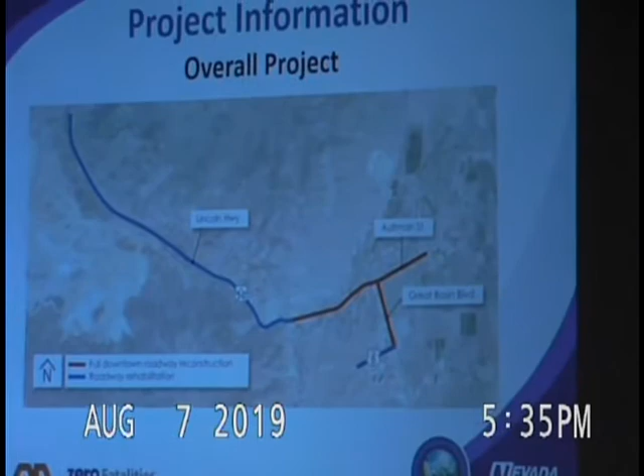Overall, the project is a lot of what you're seeing out there right now. The blue line is currently being constructed, the 3R portion, as well as some trunk line ITS conduit that's being put in. That's under construction right now. You guys are probably driving through those construction zones every day as you're moving around.

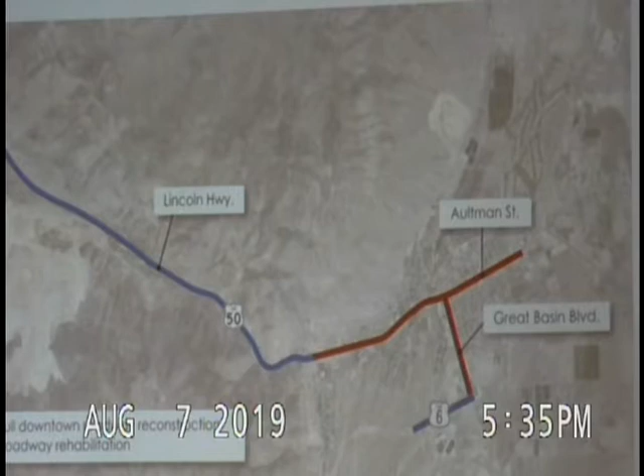The project we're really focusing on tonight is the red, and that would be the Downtown Reconstruction Project. It basically goes from 1st Street out towards 15th Street on East Aultman, and then up Great Basin to Highway 6.

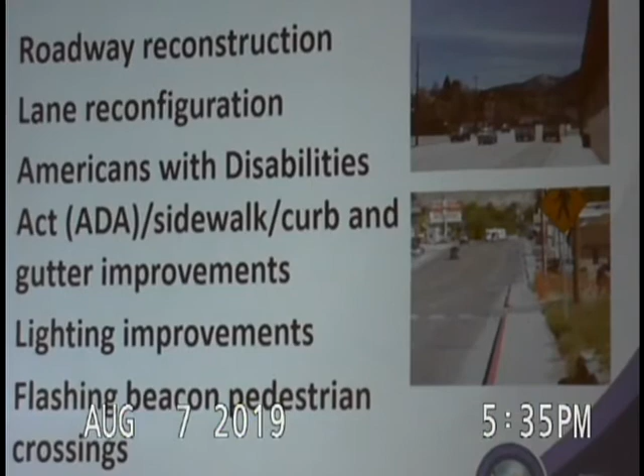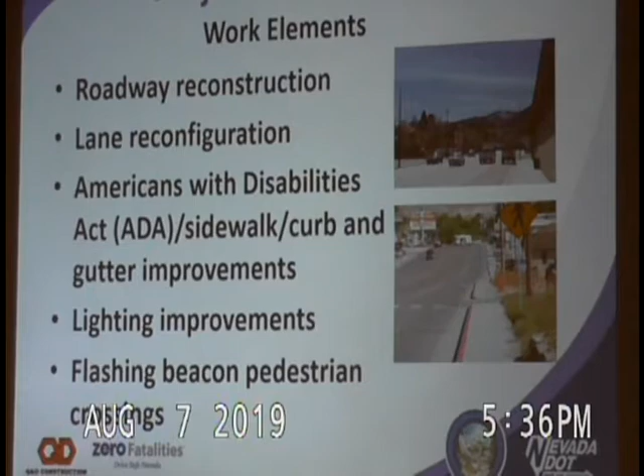The work elements are roadway reconstruction, some lane reconfigurations, Americans with Disabilities Act, ADA, improvements which will be sidewalk and curb gutter improvements, curb ramps on the street corners, and lighting improvements, flashing pedestrian beacons. These are pedestrian-activated flashers, so that when pedestrians are crossing the heavier used crosswalks, they'll be able to push a button, and it will blink an LED amber light to warn drivers that pedestrians are trying to cross.

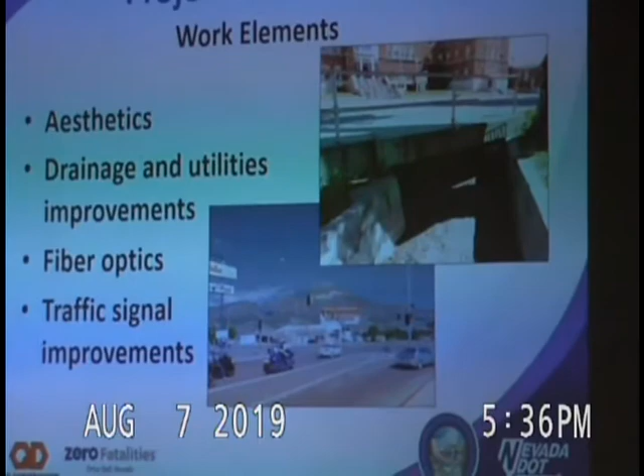Aesthetics, drainage, and utilities improvements, fiber optics. The fiber optics we're actually installing will include some internal NDOT fiber going in for our needs, and then we are putting in a trunk line for future fiber optic expansion throughout the downtown corridor.

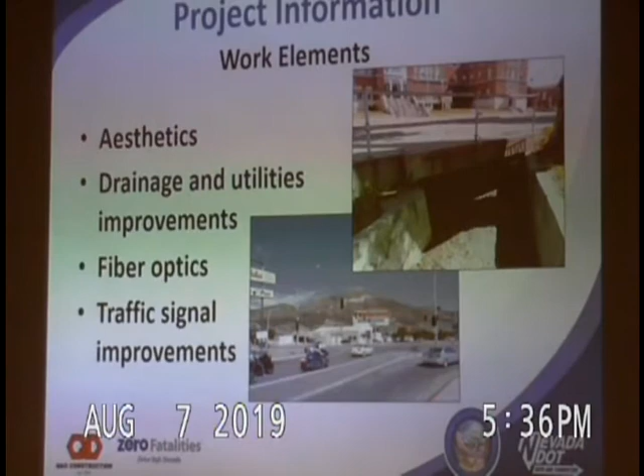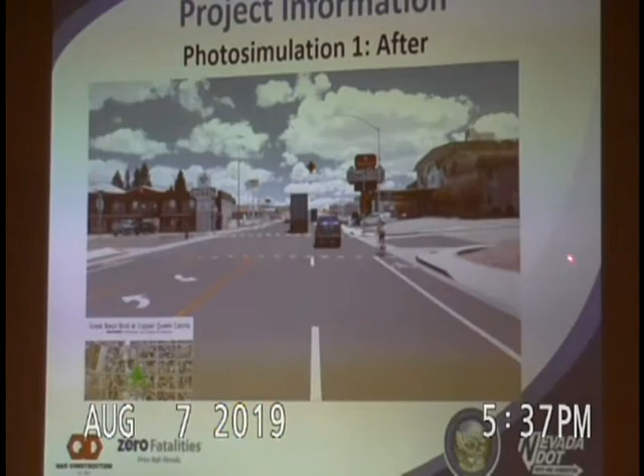Traffic signal improvements, so these, if you've been here before, will look very similar. If you're over at the boards, they're also what we have displayed there. You've got your before and after at the Copper Queen. This is one of those pedestrian-activated flashers up here, so when pedestrians are coming down across the crosswalk, they'll be able to hit a button, and it will blink to advise drivers that somebody's getting ready to cross. The downtown corridor is right here across from the Nevada Hotel.

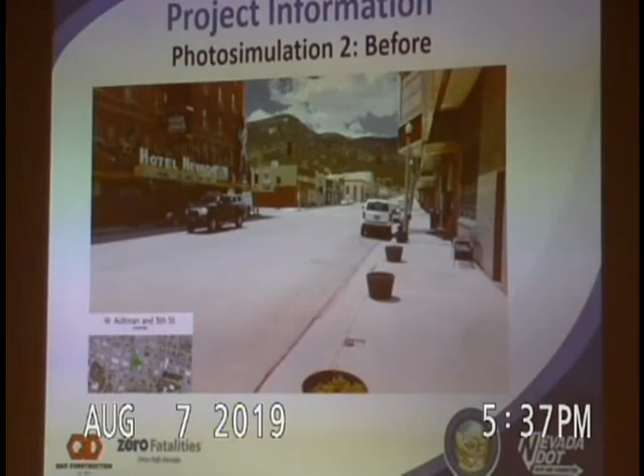And there's the before and after. We're looking at maintaining the on-street parking that's currently down there, putting in bike lanes. We'll be converting the current 4 lanes downtown into 1 lane in each direction with a 2-way left turn lane in the center, similar to what you have on Great Basin heading up the left turn lane.

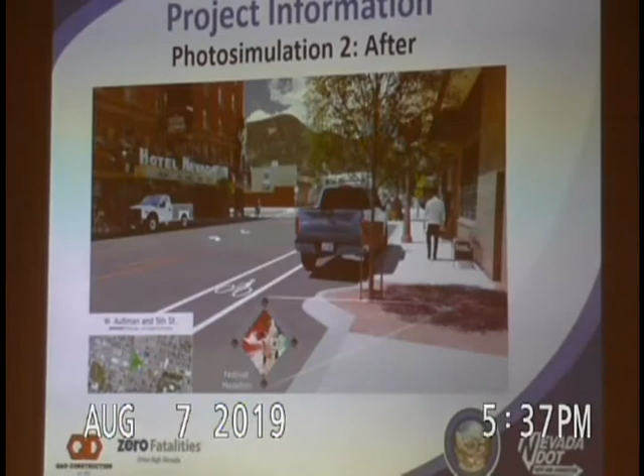Intersection improvements at Great Basin and Aultman. We'll be having a free right to the east, which actually heads north. And then there's the 2 lanes going up, so we'll be doing the same thing with that complete streets concept. We'll be altering the striping a little bit.

We'll be improving the intersection with dual left turns here. So you'll see the trucks in the right lane, cars in the left lane. Those will be able to move simultaneously through this intersection and up towards Highway 6. That should improve the functionality of that interchange significantly.

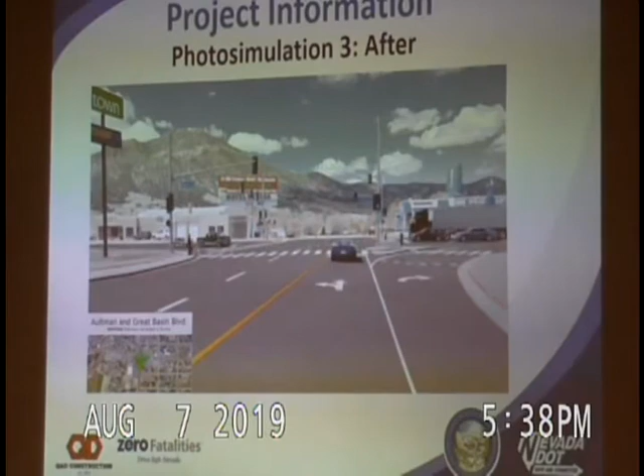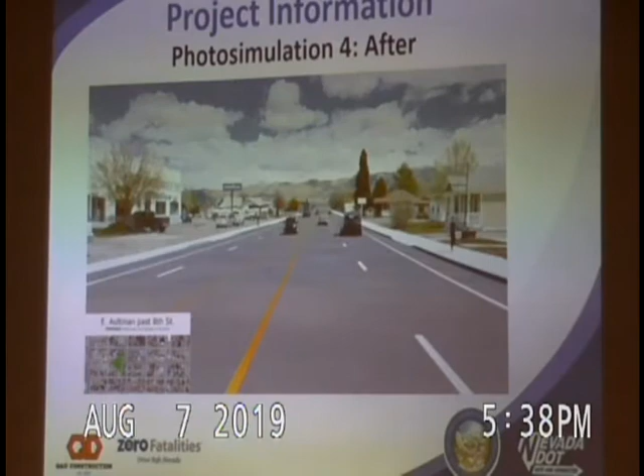And then the before and after of East Aultman. This is right by the tire store, and this is where we'll be transitioning back out of that complete streets concept into the 4-lane configuration for East Aultman.

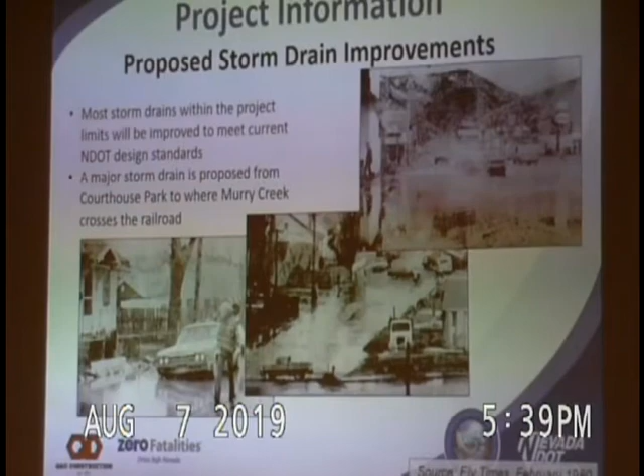And then we've got the drainage improvements. As some of you have been around a while, you know the downtown section has historically been flooding occasionally. We are actually going to upgrade the downtown storm drain system to hopefully relieve a lot of this.

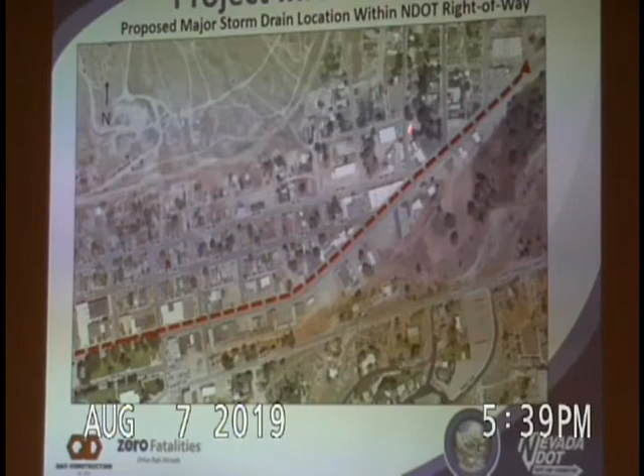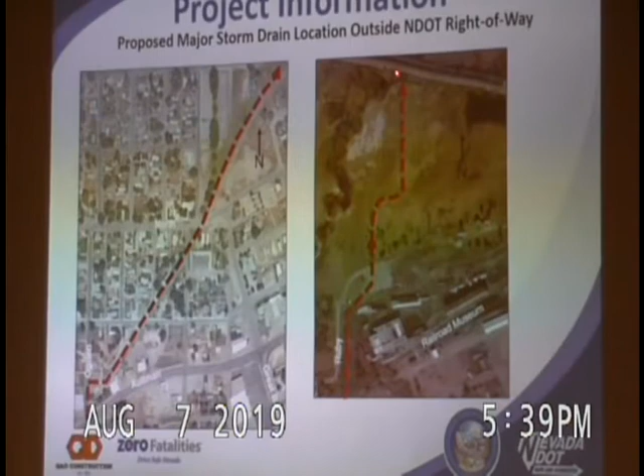The route that we'll be following goes from the middle school, where the majority of the box improvements start to take place. We'll be heading east out towards Ogden, at which point we'll leave the NDOT right of way and go through the city right of way, up through the museum, down through the city and the railroad museum's right of way, out towards the railroad museum, and then out to this current culvert that's adjacent to the tracks out there north of town.

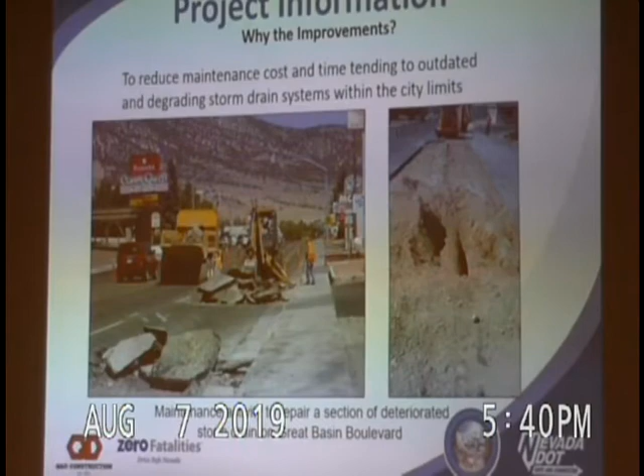So why the improvements? The big thing is trying to address the lot of maintenance needed, as the city is upgrading some water lines and sewer lines, as well as our storm drain system on Great Basin and throughout town. That will hopefully eliminate some of the money we're spending on maintenance to keep these functioning and give us longer longevity.

Landscaping. John, do you want to talk about this one?

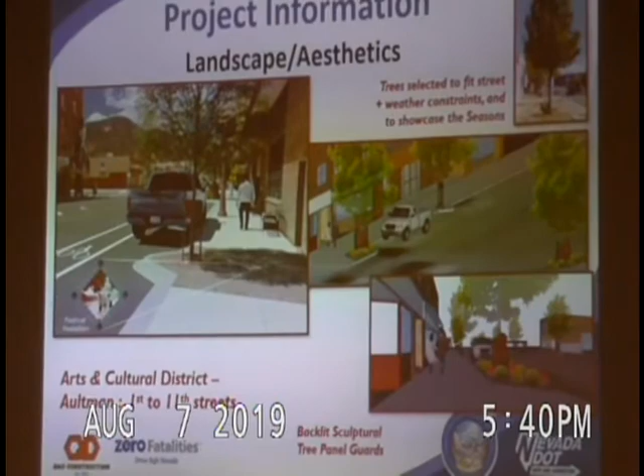Good evening, my name is John Laitwall. I'm the landscape architect supervisor with the department, and I'm going to share with you some of the landscaping and aesthetic components of the project. We're focusing on the downtown core areas with most of the aesthetics, as well as having some sentinel signs or gateway monument entry signs into the city on some of the outlying streets.

So what this slide will show is the proposal of street trees. We have new street trees being proposed, and they really are a component of the complete streets. The complete streets offer us more space, more room up and down this corridor to add planting trees that are fully irrigated. We want to get color there, interesting foliage and shading.

One of the reasons why we do landscaping and aesthetics is quality of life. This is an important part of the project, and economic development, as well as just improving the visual quality of downtown.

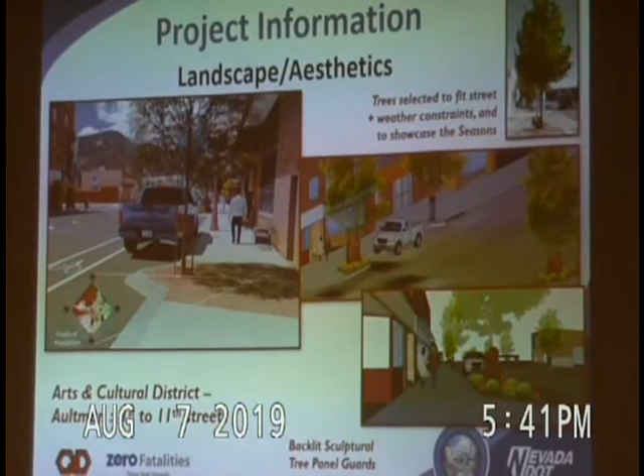The street trees are selected to endure the challenging environments here, the winter and cold and the heat, as well as the form of the ones that don't branch out too far into the roadways.

One of the concepts for this project, we like to have the landscape and beautification, the trees and planting, be important, but also tell a little bit of the story of the town. Some of the history, some of the culture. The culture here is fascinating throughout the years. We wanted to celebrate some of the cultures that were here early on: Hispanic, Slavic, Native American, Asian, just to name a few. These are examples of medallions that will be set into the concrete within the sidewalks. They're made out of porcelain, extremely durable and hard, and will be placed as medallions that you can walk across, but you can also enjoy the colorful form as you're taking a walk.

The Sentinel signs are proposed now for out on Highway 6 and one on West Aultman as you're coming into town, as well as close to the railroad tracks on East Aultman, Highway 50. This is an example of one.

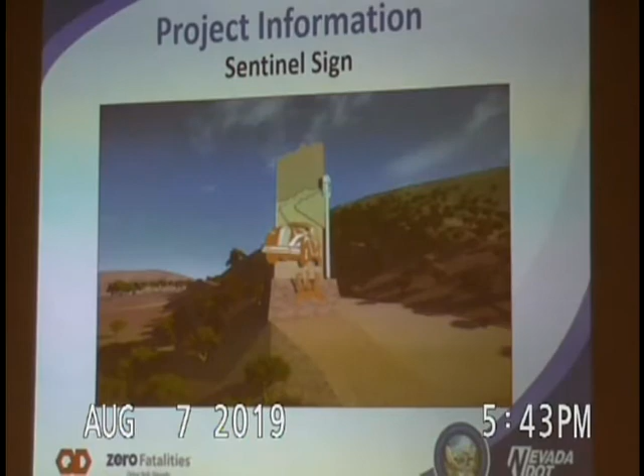Just to share with you some of the materials, we have these other slides that we're going to build these monuments quite large. They're going to be 13 feet tall. The form of the background is a painted rock formation made out of concrete form liner. The metal is a patinaed metal to look like copper, representing the copper mines, as well as stainless steel and a rock base there.

They will be lit. Off to the right, there's renditions of the lighting. Conceptually, right now, we're thinking of lighting the back. We may change that to have it just completely uplit from the base and just shine the whole sign. This will be a nice way to welcome people into the city.

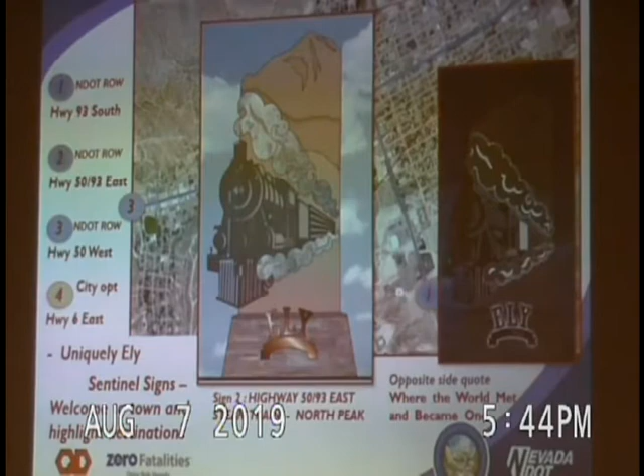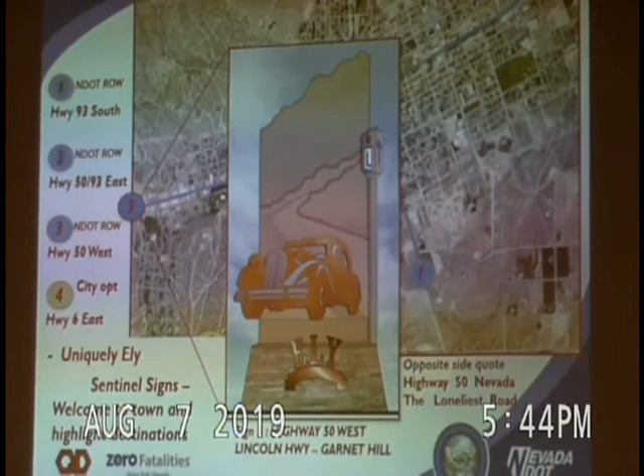This is the train number 40, the historic train. Saw it for the first time today. It's amazing, got some great photos. Incredible train museum, we want to celebrate that for sure. And then the celebration of the Lincoln Highway is another historic component of this wonderful city. This will be on the West Aultman.

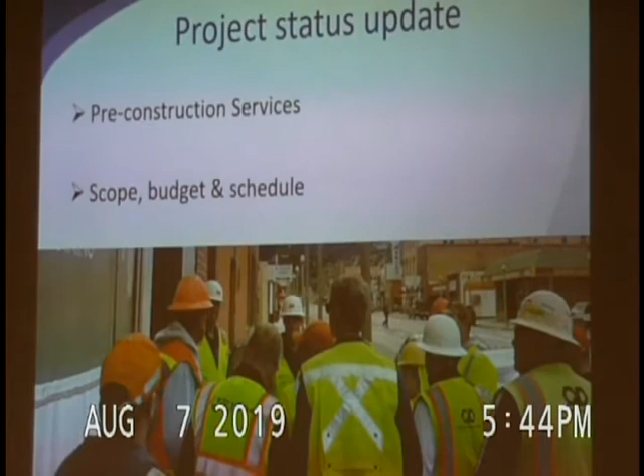And with that, I'm going to now introduce you to Jay Pullen, our project manager for the project. Thank you.

Now, unlike everybody else, I shake, so I would prefer to just put this on the stand so you don't have to watch me. Ooh, ooh, ooh, ooh. Good evening. Thank you for coming.

There is a lot for us to cover, and I had written a great presentation, and I thought it was great. And I thought about it, and the truth is that sometimes I have to write it in such a way that it's easier to understand. I look at it and I get caught up in all the details. It changes. There's a lot of moving parts to this project. And sometimes I need to sit back and remind myself, what is the message here today, tonight?

And with that, I thought it was very important that we started this presentation off discussing what it is that we have shown you in the past. We changed a few things through this process, but it was really important so that we're not trying to pull a fast one on you. You are aware of what we showed you last year. And at this point, now I'm going to provide you with an update of where we are in terms of the pre-construction phase of this project, and of course talking about the current scope, budget, and schedule.

Now, as I was introduced, my name is Jay Pullen. I met a few of you earlier prior to this presentation. I'm the project manager. What does that really mean? Well, my role is to manage and deliver major, complex, and significant or regionally significant projects. That's my goal. And this is still Sean Patterson's project. I didn't take it away from him. It's still a roadway project. I came here to facilitate because we changed the delivery method, and my goal is to explain to you tonight why we did that.

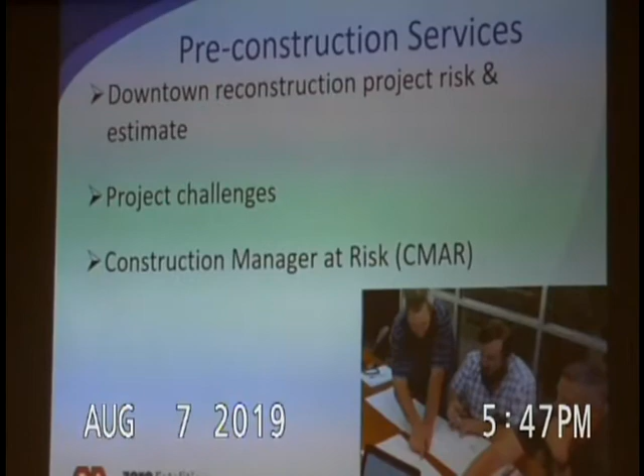So what does that mean? I can tell you that I was brought onto this project because when we reached 60% design, an engineer's estimate was performed and showed that it exceeded what the original budget was. We had a budget of 26 million, and the engineer's estimate was 40 plus. Okay, this was an eye-opener for us. It was a red flag.

So what we did was we recollected ourselves, looked at the scope. The scope had been growing for over a decade. Things added to this project. And what we wanted to understand was, what can we do to show that we've done everything in our power to meet the intent of this scope to this city, but at the same time, do it within a reasonable budget.

And we had to prove it to the department, our own supervisors, that this project really is worth that much in terms of its elements.

So in October of last year, we performed what we call the cost risk assessment value engineering. This is a special study that looks at a project and actually identifies risks to it. This project has a lot of challenges.

This is a very interesting project. I've heard a lot about Reno and Carson City and talking about Vegas, but I have never seen a project so complicated as this one. This was very unique in itself.

You have the FEMA floodplain through US 50. Major challenge. We can do improvements on that corridor, but we cannot make it worse. As of right now, we know in certain areas, you have a foot of water during the 100-year flood. We can't add an inch to that, which means whatever we commit to, we have to build and make sure that we're either making it better or making it the same.

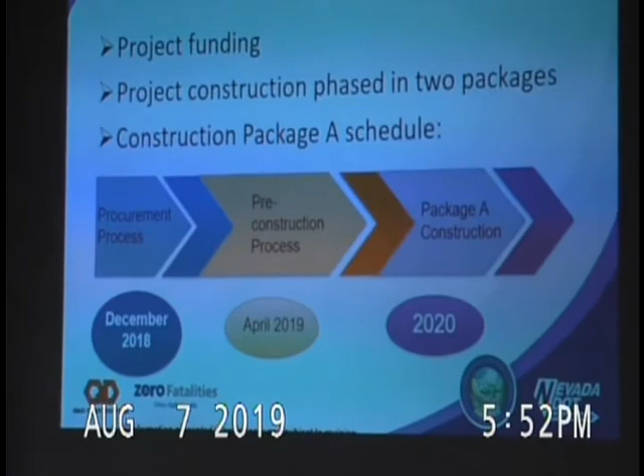So with that said, we don't want to delay the project. It's been delayed for many years. So what do we do? We break it into packages.

Construction package A goes out with the initial $26 million that was budgeted. Construction package B, with Q&D, we will complete designs for that package by spring of next year. It's happening. We're going to get all of the right-of-way certifications. We're going to have it. It's going to be shelf ready. So as soon as funding becomes available, we're dropping on it.

There's no hesitation on it. I can literally wave my hand and say, I have a project, and I can spend your money. So that is our goal.

So that was the reason why we broke it into two packages, to not delay. I want to see cones. I want to see something being constructed. If not, if we have to wait for the funding, then there's no urgency for our design team to get to 100% right now, because lots of times we don't want to design something unless we have funding for it. This is one of those rare opportunities where we're going, hey, we're going to keep going. We're going to continue agreements with the city, with the county, we're going to get it all completed.

So with that said, two construction packages. Our goal is to basically have a guaranteed maximum price from the contractor for package A by December or January, so we can present it to the Transportation Board. If NDOT accepts their estimate, they can begin mobilization by spring of next year for package A.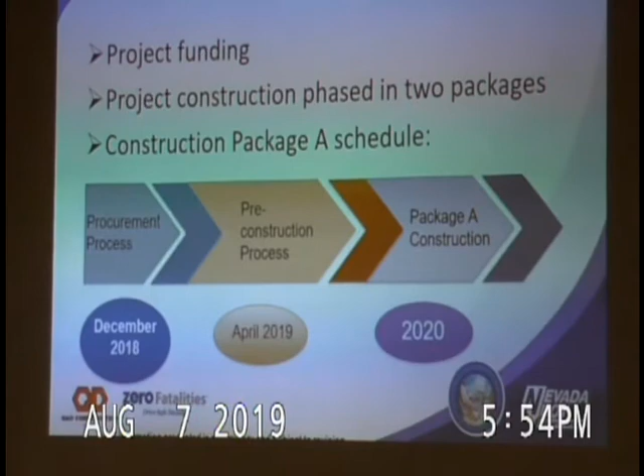Now this slide is the most difficult for me, and it has to do with why everyone appreciates this job. All of our designers look at the excitements of our project. There are areas that are very canned, very traditional, but the downtown elements were something that we all stood behind and we all supported. It was exciting. The ability to do decorative lighting, the ability to have the landscaping irrigation system. I can't thank the city enough for everything they've done in terms of being willing to take on the maintenance burden for a lot of these facilities.

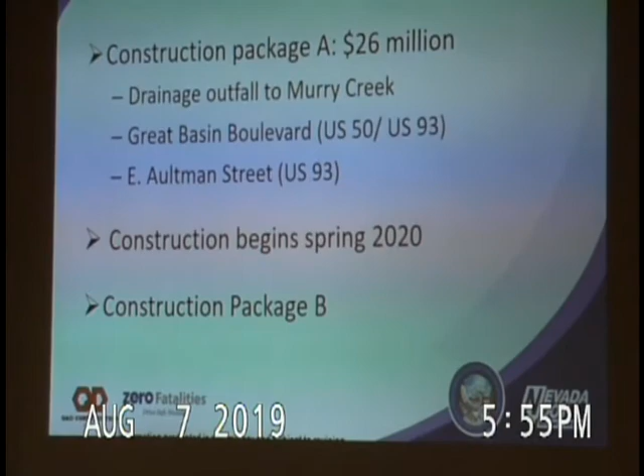Not only that, this is a very challenging drainage project. I have a hydraulic engineer in the back who has been dedicating many hours and sleepless nights trying to make it work and fix every conflict we've been seeing in the downtown corridor. And with that said, I put all my chips in one basket. I truly believed I was going to take this $26 million and start on the downtown first. But I'm going to explain to you why we didn't select that.

As I said, it was the most popular aspect of the project, but at the same time, it was also the most difficult to decide. And the reason for it is the drainage. When you look at Great Basin and you look at downtown Aultman, one of the things we realize is we are increasing the flows. And why are we increasing the stormwater?

So we can reduce the FEMA impact. We want to make it so when we walk out of that downtown corridor that we have made an impact to the city and we basically reduced the FEMA impact plain, which means some houses won't be in that plain anymore. That was one of the goals. And I can tell you there's 10 of them. I remind myself every time we go through this project, what are our project goals? And one of them has to do with making a difference in the community with the FEMA plain.

So when we looked at that, we have to fix the outfall area. The area that's outside has the majority of the risk associated with it, in city right-of-way. There's been land swaps with property owners. It's right next to the railroad. It's in the backyards of homes in this community. We have to do that part first, because if we don't put the infrastructure in place, we could have water blowout if we do some other section and never correctly make those types of improvements. When we looked at that, that's approximately $5 to $6 million.

So with that said, what can we do with $20 million? Approximately, based on the existing budget. And what it came down to is the downtown corridor is more than $20 million. In fact, I can't even cut all of the fat off of that corridor in terms of, even if I removed all the trees, all the irrigation, all of the aesthetical features, that's maybe 2 or 3 million. No, I would have to be making major cuts that would basically be violating our state and federal policies for FEMA and ADA, and we can't do that.